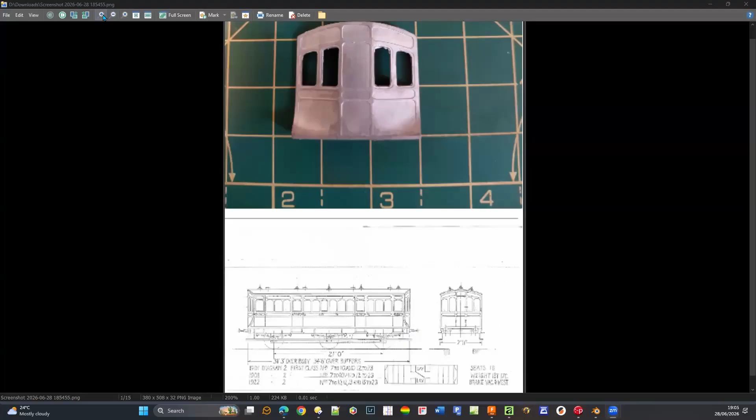I was sent this email the other week, and the request there was, let me get the mouse over, it's this curved bit down here that we're interested in. I'm not covering the bulk of it at all. And if you look at this profile down here, let me just zoom that up a bit. We can see that we've got this front panel here, which is square, if you like, upright. We've got the side panels at an angle, and then they come down and they curve back to the base, which ends up with, you can see the curve there.

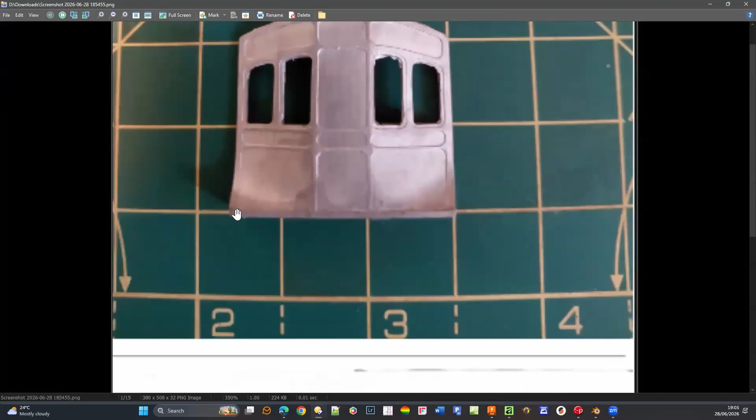And the difficulty, or the problem, the unknown, was creating this curve down here. Now, I'll show you a way I've done it. I'm not suggesting it's the only way, and I'm not suggesting it's the best way, but it's a way that allowed me to answer the email that I had. So let me pull up Fusion. Let's get rid of that a moment. Right, so there's the Fusion finished one.

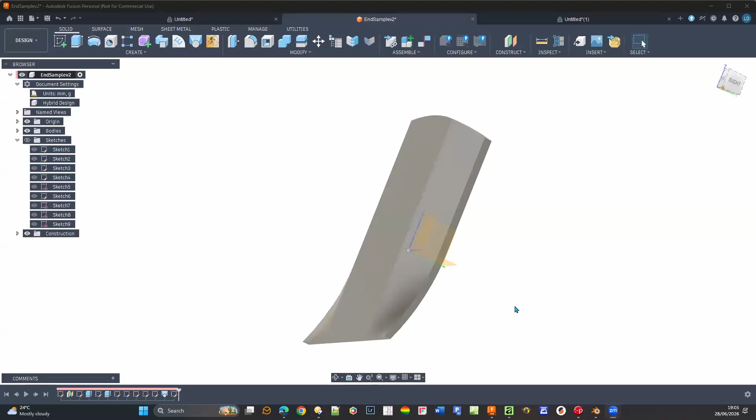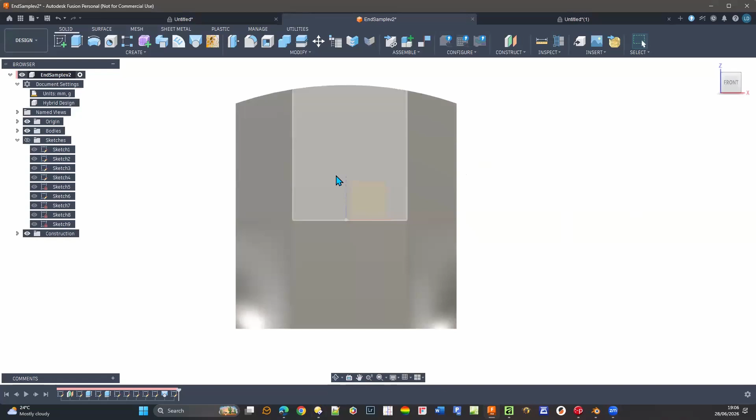I'm not worried about the windows and the bits and pieces. I'm just looking at the front panel itself. And tonight I'm going to concentrate on this bottom half. The top half is just extruded out, and you can just put windows on these faces to suit yourself. But what we're looking at is creating this curve. You can see the shape of it there. You've got the center bit, which is what I call straight down. And then you've got the curve, which comes that way and also that way.

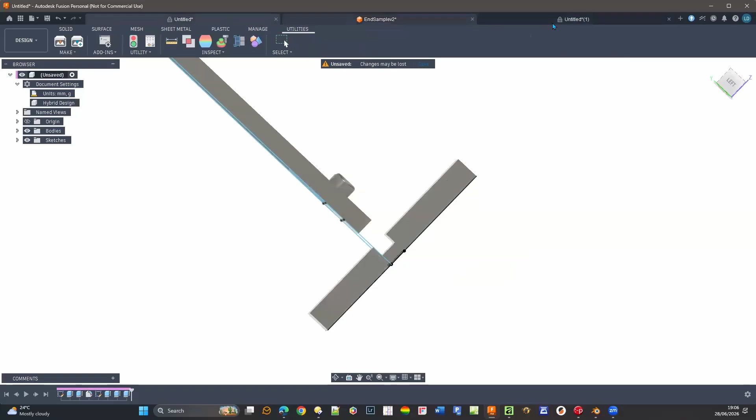I should have titled these and I'd know which one I was looking at. Right, okay, so this is the curve one now that I'm going to show how to get. A little bit like a snowplow, really, I suppose. And I've been assured by the person who requested this that this is the sort of thing they were looking for. So let's have a look at how we do it. Now, I didn't go into that one, that's something else. Right, so I'll backtrack on this one, and we'll come forward. Let me just get back there. Right, and let's switch our sketches on.

So the first thing I did was to create a sketch. Now, if you refer back to the drawing that we looked at, this is what I'm going to call the mid area, if you like, which I think is there. So that sketch is that line there. And the idea is we're going to use that as our base sketch. You can extrude up from that, and we'll be doing a lofting command down. So just to show you how we're going to go about it, let's go back to Fusion. So that's the one sketch.

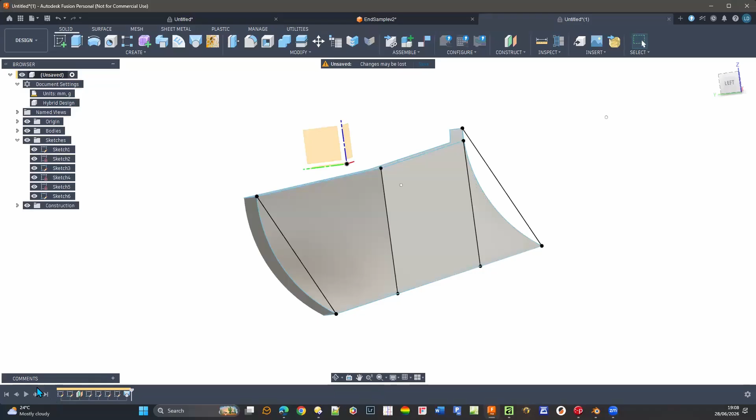Now the next stage is to do the bottom sketch, which is the chassis. And for that one, I created an offset plane. And for this, I'd done about 10 millimeters. I didn't go into dimensions because the idea with this is to show you the technique, not necessarily the dimensions. Let's get the sketches switched on. Hang on, let me just go back. I pressed the wrong buttons again, as I always do. Right, so there's the bottom sketch.

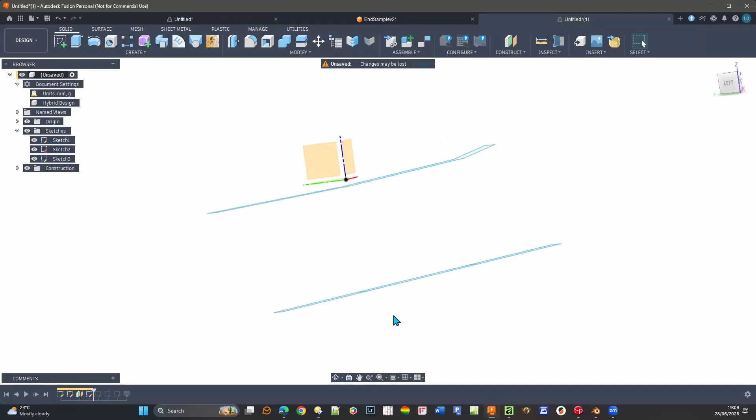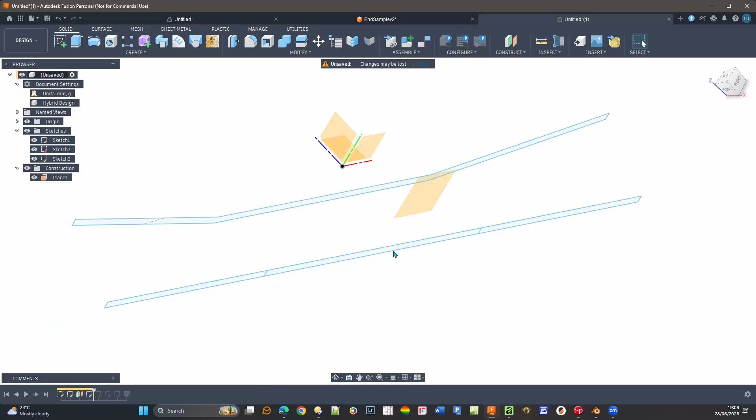Now that sketch there is on another plane. This plane is an offset plane. This top one is drawn on that plane. This is an offset plane at the distance down that you want to go on that front panel, okay? And it's just a straight line. Now, what will become apparent is that this one was drawn underneath that one, and if we go on the top, we can see the pair of them together.

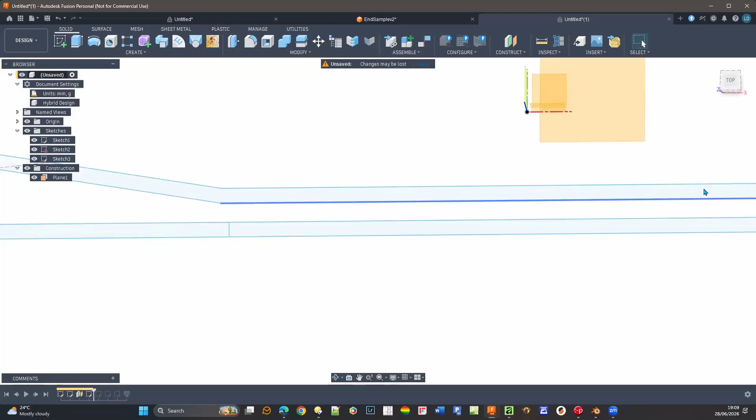Top. That's better. So it's important, I found, that we put two lines here, which you'll see why we do that as we go through it. Now, if we look, the lines basically match up with this bend. These lines are on the bottom sketch, not the top sketch, okay? This will become apparent as I take you through it. So there's our two bits that we would normally do a

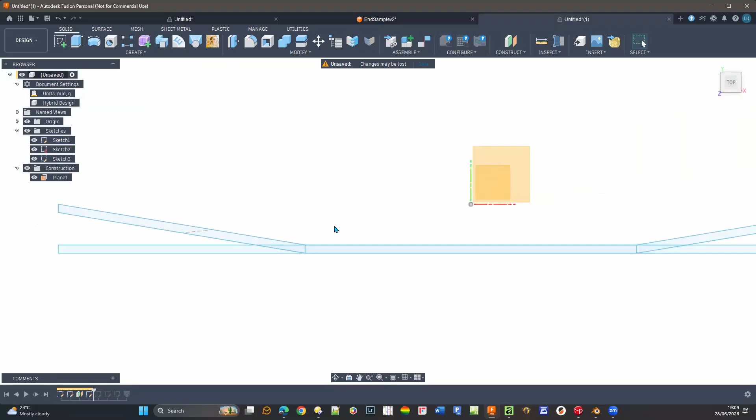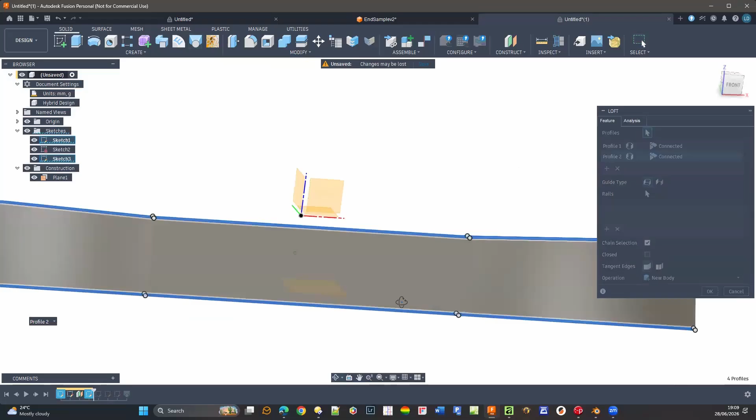lofting on. Now, if we do a loft on there, we can click on the loft tool, highlight the one, highlight the other three because there's three separate ones there, and we have the loft. But you can see we don't have the curved edges. The center one is fine, but this is not right at all. So let's cancel that and see how I got over this one.

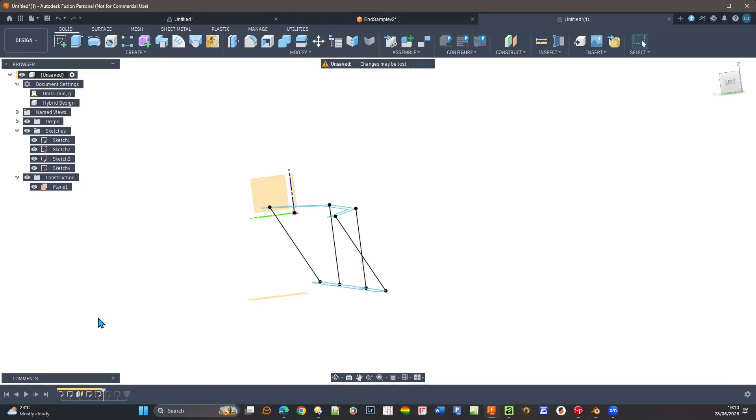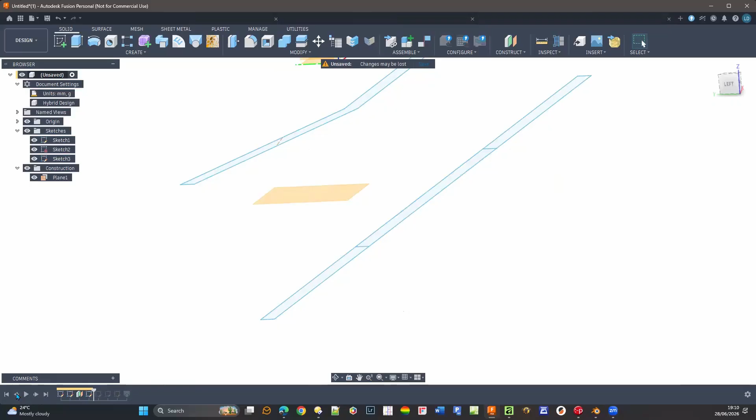So what we do now, we go into 3D sketch mode, and this is where it gets a little bit awkward. So let me just go back one, and our aim now is to create a sketch, a line from that point to that point, and that's why I put those lines in there, which you'll see in a moment. And we also do a sketch of a line at each end. So if I just go back a bit and we go into sketch mode, it doesn't really matter which plane you sketch on because you're going to do it in 3D when we get control of it again.

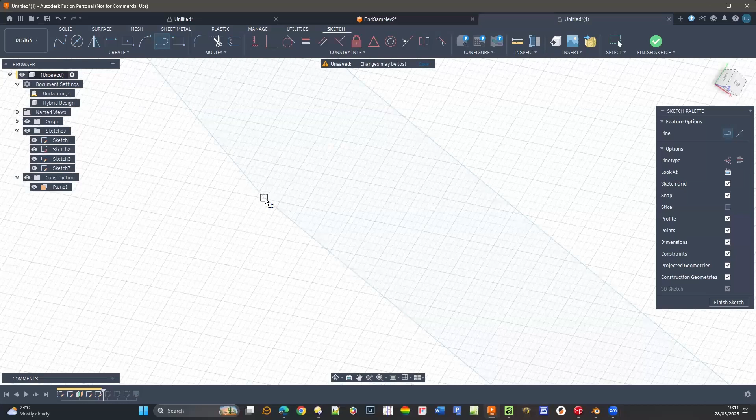The main thing here is also to make sure that the 3D sketch is turned on over here. So what you do is, and you really need to zoom in for this, go into the line command, and as I say, we need a line from here. Now, if you come across, when you get to the point in question, you'll see the square come up. That's the point to click it.

And then we go down to our corresponding line over here, and again, come along until you get the square. And when you get the square, you know then, let me just get it back in.

Whoops. I'll get the hang of this one day.

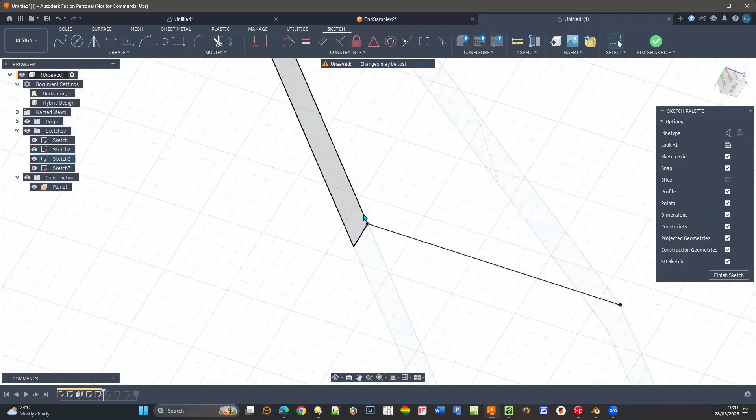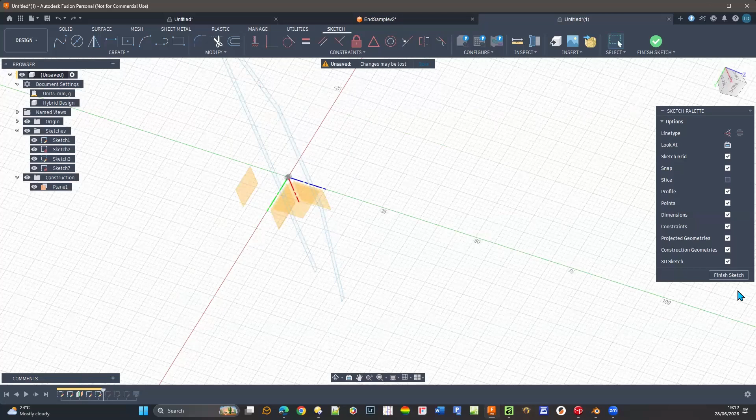You can see now I've actually got a line going from that point to that point. And I do the same thing on the ends, from that point down to that point. And the same on this bend here, from that point down to there, and the same on the end. So let me just cancel that and go back to our sketch on the next one. So you can see now I've got those 4 lines in place.

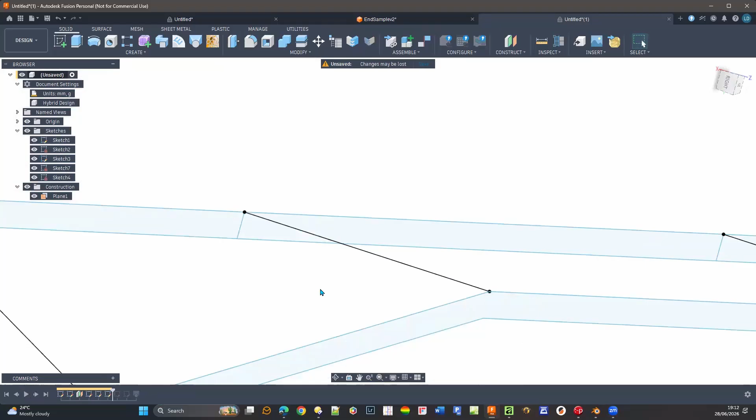But as I say, drawing in 3D can be a bit difficult because if you don't do it in that way, then your line could end up starting there and could end up anywhere down here. So you really need to have some reference points. Now you might think, well, why have I put straight lines here when I'm really aiming for the curve? Partly because by putting the straight line in, I found it easier to put the curve in.

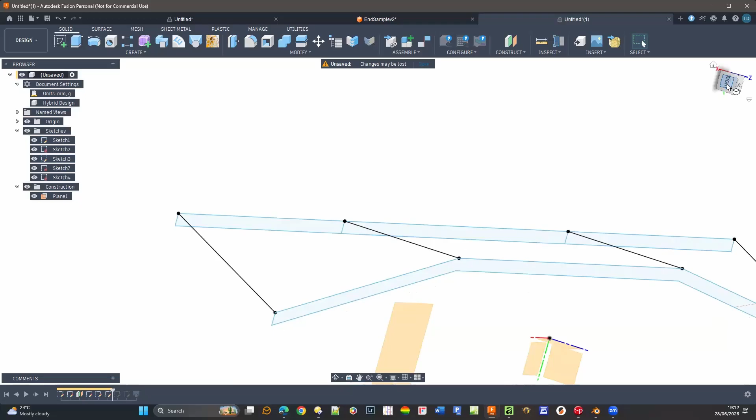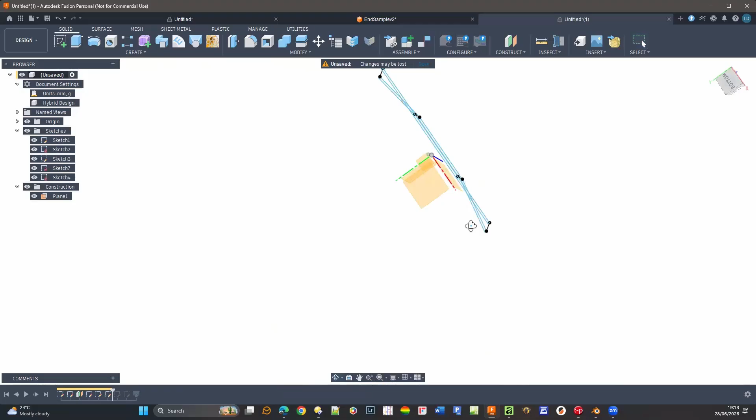Because if you put the curve from that point to that point, the curve itself could go almost anywhere unless you're doing it right. So what I've done with that one is I then go into, let me just get it, let's get it the right way round here. This is where the fun starts. Bear with me. Right. I know it's upside down, but that doesn't really matter.

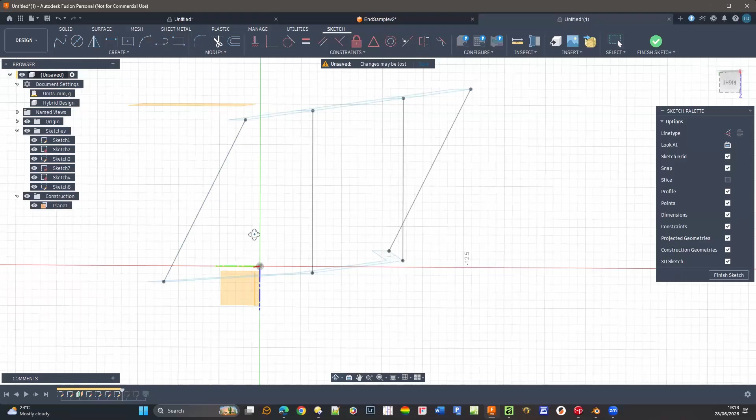So what we're going to do now is we're going back into sketch mode again. And what we're doing this time is drawing the curve from there to there. Now what we've got is that we've got the line to help us. So if we go on a slight angle there, and we go into the 3-point arc, we can then pick up that point quite easily. It will lock to it. We can come down to that point quite easily.

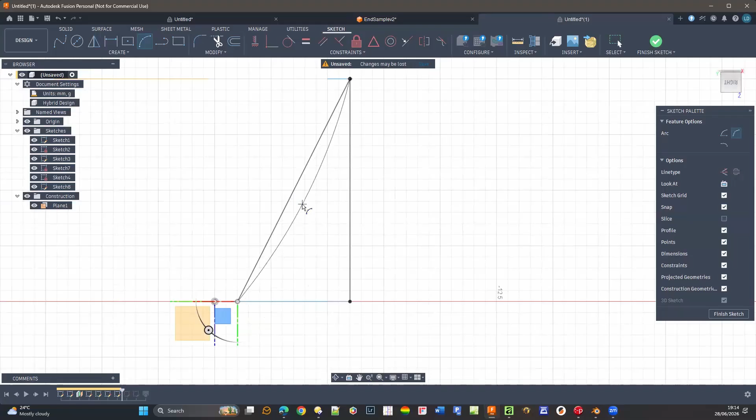Now you can see it can go all over the place, but because we've got that straight line to help us, then we can work out where we want the curve to go. Let's just get that. So you can see how you can come down. Now what you can do, of course, is that you can measure off from the straight line there as well, or you can do it purely by eye.

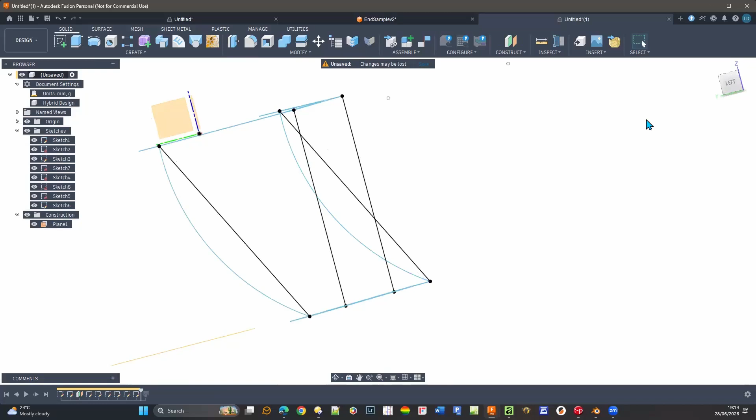If I go back now to the next line, finish the sketch, and you can see there now where I've done the curves. Let's get it the right way up. So you can see where I've drawn a curve from there to there, and then pulled it out from the line.

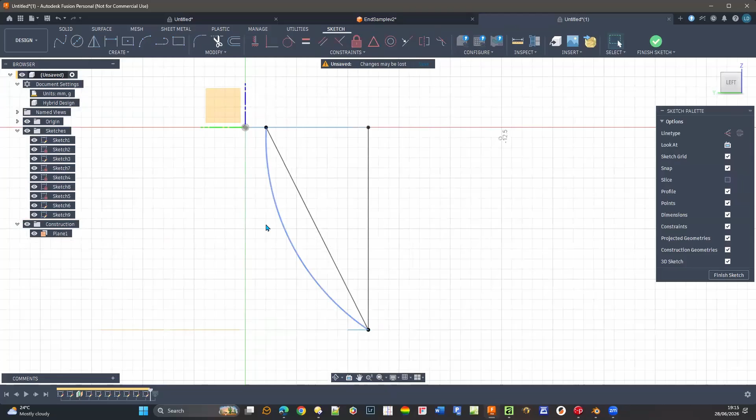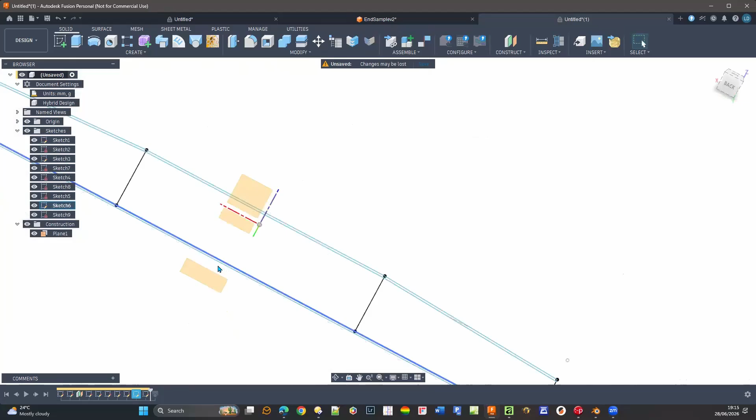Now, when you've done the one of them, it's easy to do the other one, because if I was to do, let's just go into sketch mode again a moment, and I'll delete that one. Oops, let's get rid of it. I think that's the one I want to get rid of. Yeah. So let me go round. And right, and there. It's better.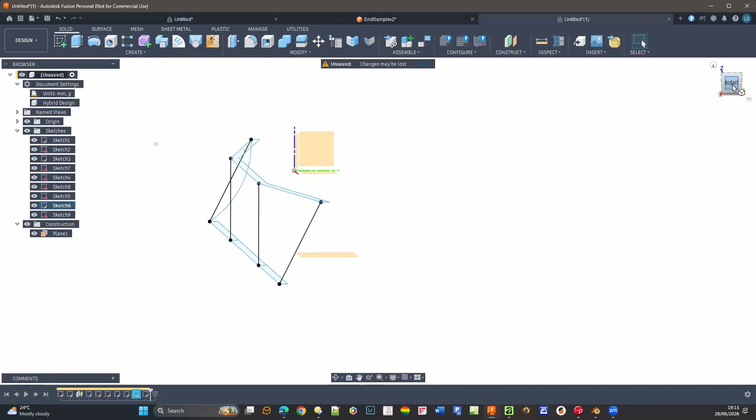So we've done the sketch on the other end, the curve. I want to do the curve on this end. If you get it right the way round in that way, you can then go into sketch mode on there again. And of course, 3-point arc, pick up that point, make sure you got the square, pick up that point. Then all you've got to do actually is just line it up with that one. And that brings you the other one.

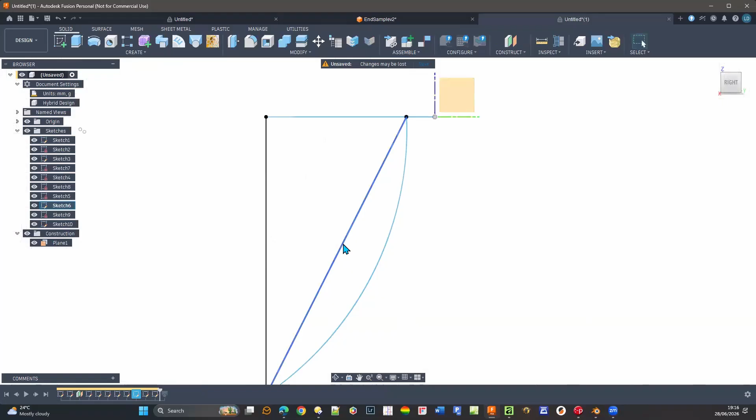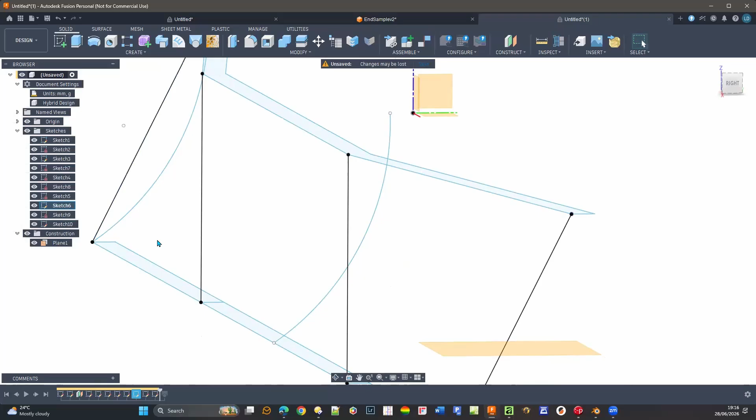If you want to measure this curve, then I would suggest maybe some measurement construction lines out from this straight line. But really, I think it's a sort of curve that can be done almost freehand. So you can see there where I've missed it. So what I'm going to do is undo that one. Let's go back. Because obviously I've picked up the wrong curve.

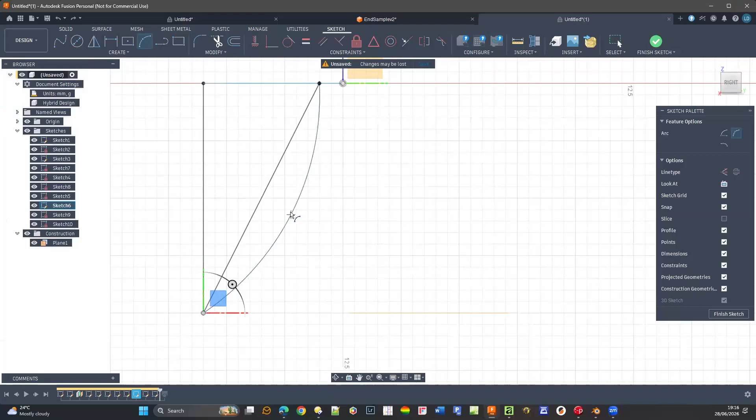If you find that happening, then you need to go into this sort of mode, do it again, make sure that you can get at it, and then down to that one, and then go up to the right one, and then line it up. 3D drawing can be a bit difficult because you're not quite sure where your points are. If we look at it now, we should be okay.

They're in the right place now. You can see how easy it is to pick up the wrong one. So sometimes you have to just go into a 3D view as well to pick up the right points, and then go back into your right one to line it up with the other one.

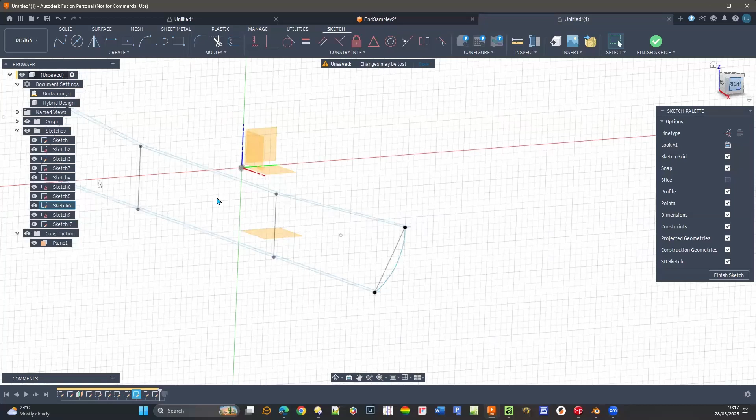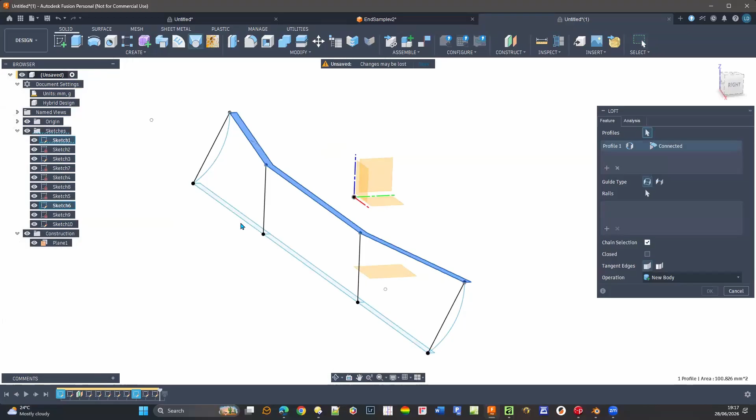Hope that makes sense. Having got to that stage, we can now go into our loft stage. We're taking the top one, and taking it to the bottom one, and we've got the same stupid shape we had last time.

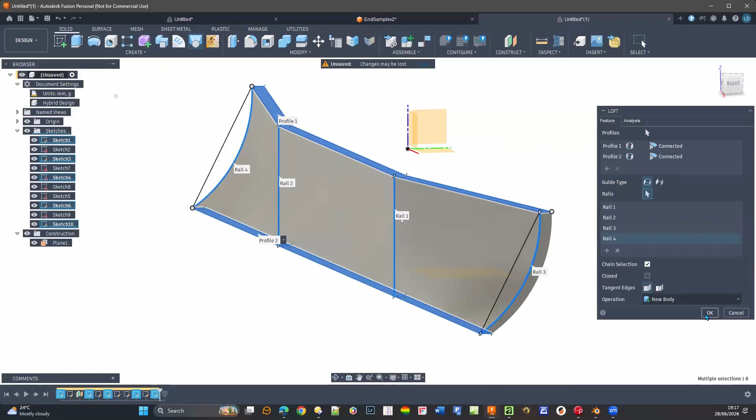But what we do now is use the rails. So we click on the rails, we select that rail and that rail, which forces the nice center one. Then we pick that rail, and that rail, and do OK. And if we switch the sketches off, we can now see we've got the shape that we want. Albeit proportionally, it's nothing like the original, but you can see how we got the curve.

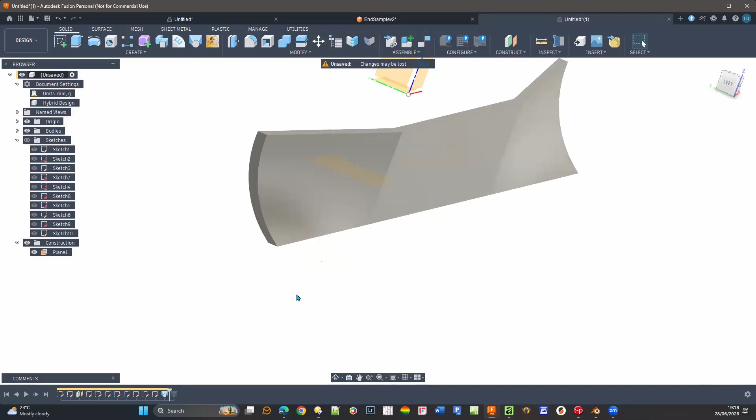We've done lofting before, and I think the only lofting we've done is from shape to shape. If you want the lofting from shape to shape, but controlled, then you put rails in. And wherever you put the rails in, then the loft will do that rail.

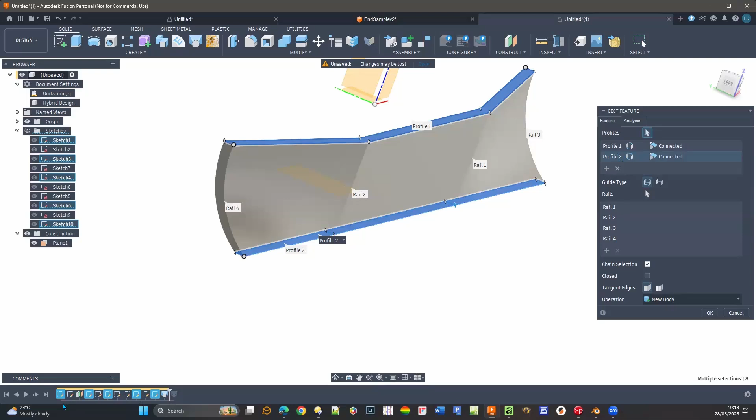So what we've done there, if we'd have taken these rails out, let's just go back and see what we've got. Let's just take them out, go back a minute. If we close off that one and go back to... put the sketches back on. Let's go back to the lofting again.

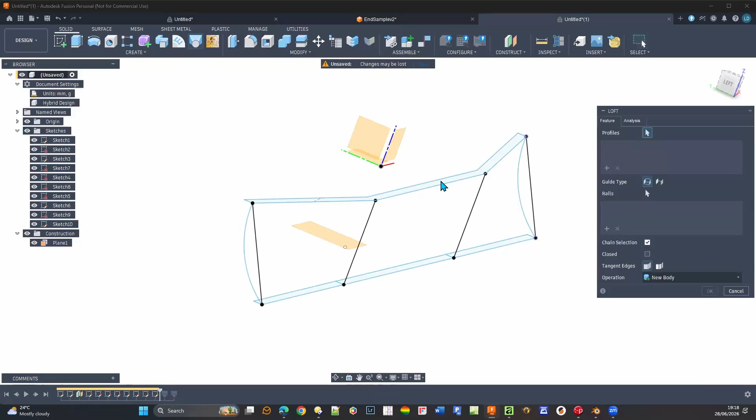And if we click on the top one, and of course this is in 3 sections because we got those lines, but those lines could have been construction lines. They're purely markers for those straight lines, as I said earlier.

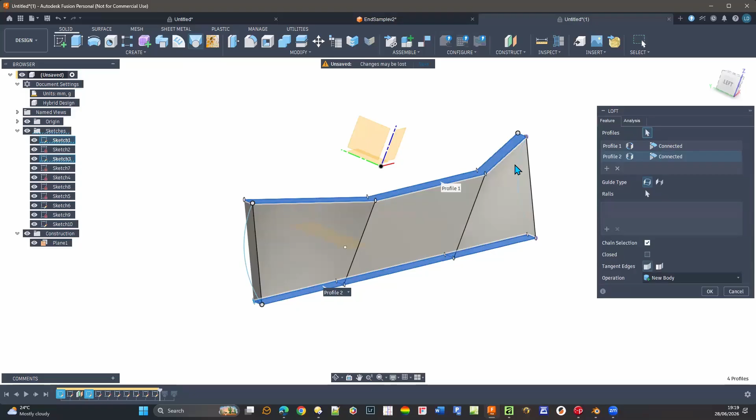Now, if we only take, say, the end rails and ignore the center 2, you can see what happens. It will just go straight through, which is not what we want, because we want the center section square. So we have to have those rails as well.

Now, if we'd have had another rail in there, we could have done all sorts of shapes. Using lofting with rails, you can create any shape you want, but it does start to get a bit awkward because, as I say, you're doing curves in 3D, and it's not that difficult once you start getting the hang of it.

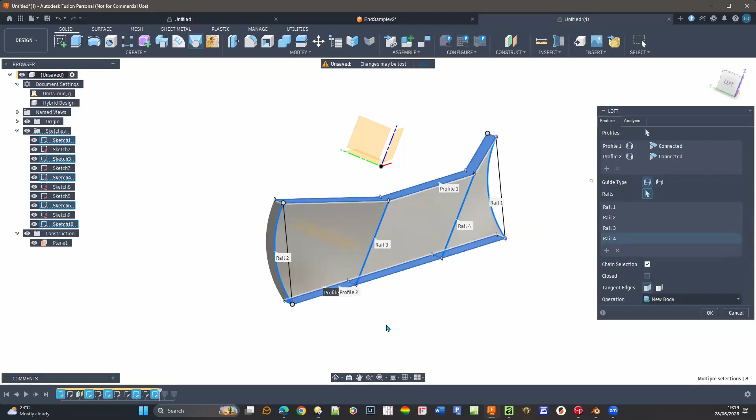So that ends up really showing the shape that we want there. Switch off the sketches. Now, from the point of view of the other ones on there, I would just lift that up, and we can extrude that up however far we want to go.

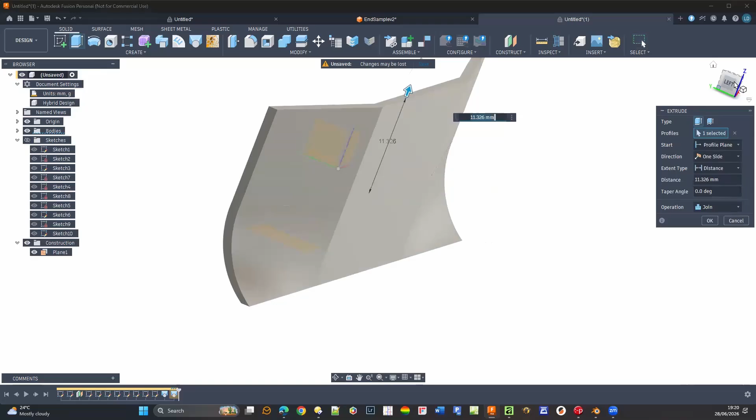Let's get it back in. Proportions are all over the place here, aren't they? And then if you want to do the curved top, which you've seen in the drawing, the easy thing there is to pick the center sketch again on the arc.

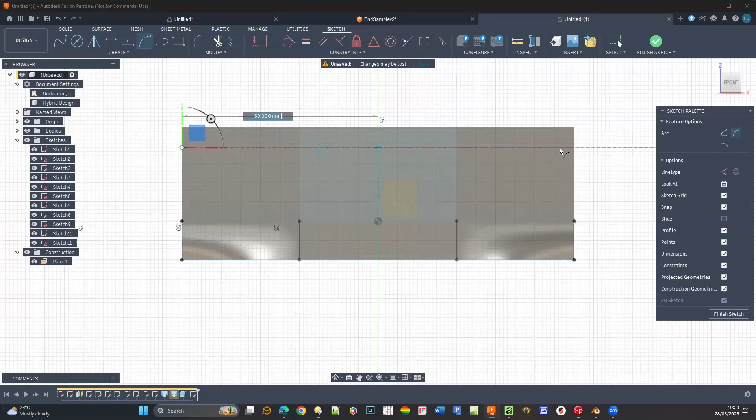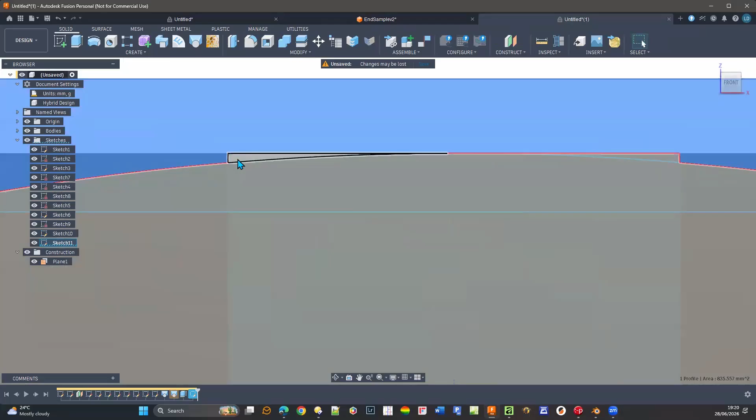Pick up the arc that you want, say there, and then I would just draw another rectangle anywhere up here, it doesn't matter. Finish the sketch, switch the sketches on, then highlight that one, highlight those little bits there, and use the extrude tool and just shove it backwards. And that's the top done.

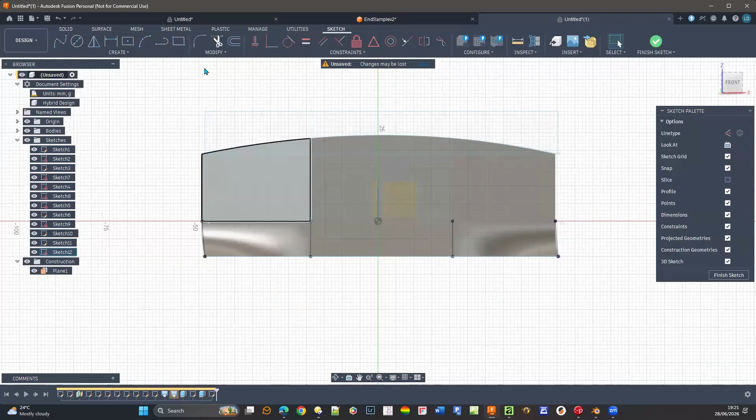And then on these, you can just sketch, go on there, and I'm not going to draw them in any degree of detail here, but you can just put your windows in wherever you want them. As I say, I'm not going to go through the detail here. And then just punch those out as well with the extrude command.

And the same on the front, and the same with the panels. If we go back to the drawing that we had here, you do the same with the panels, and the same with these, except these you wouldn't punch right through. You would just depress them by, if you've got a millimeter thickness wall, then depress them by a quarter millimeter or whatever it is you want for your size in your printing.

And the same with these front panels here. They're all done the same way. That's just straightforward stuff, really.

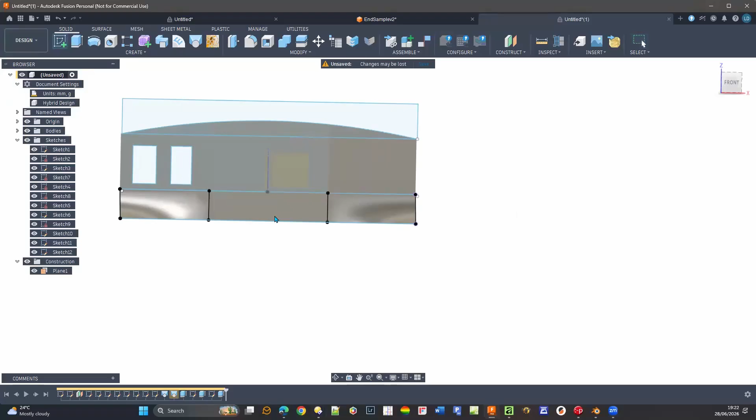If you want to do the recessed panel on the curved one, then the answer on that one is slightly different. Let's get rid of this drawing again a minute. If you want to do something on this one, then what I would suggest is that you use the emboss command. So we would do an emboss on that one, on this front panel, do our panel roughly there where we want it.

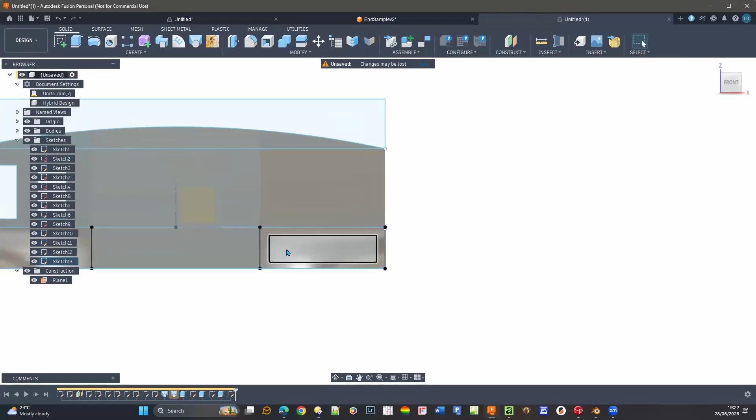This is covered in videos that we've got on my site and the MERG site. And then what you would do then, because if you do an extrusion, the extrusion will be deeper here than here, because of course the extrusion will hit this curve before it hits the other one.

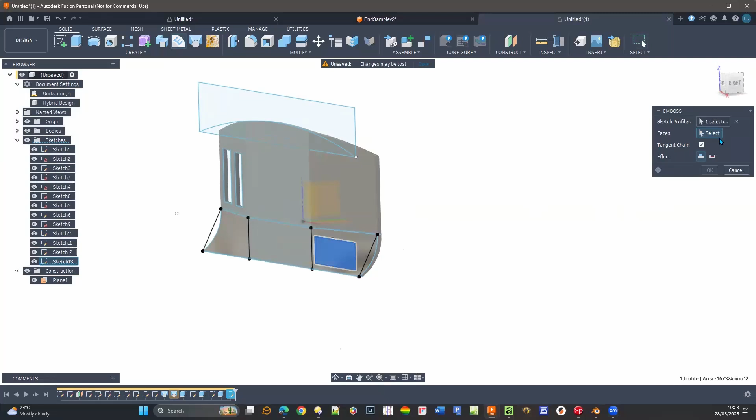Whereas if you use the emboss command and the profile and then the face, which is there, you can emboss it on there, select the face, and then you can emboss that one back so it hits the face where you want it to, and have it embossed on there quite well.

Okay, so that just about ends it, I think, unless there's any quick questions on that one.

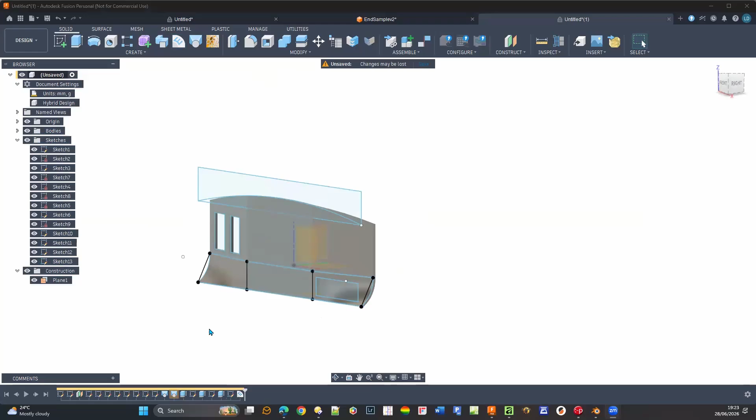Are there questions? Russ, I didn't say it when you were doing it, but I was wondering: once you get to the rails, you obviously want the two middle ones straight. After you've done the curves, wouldn't it be an asset to actually remove the angled ones?

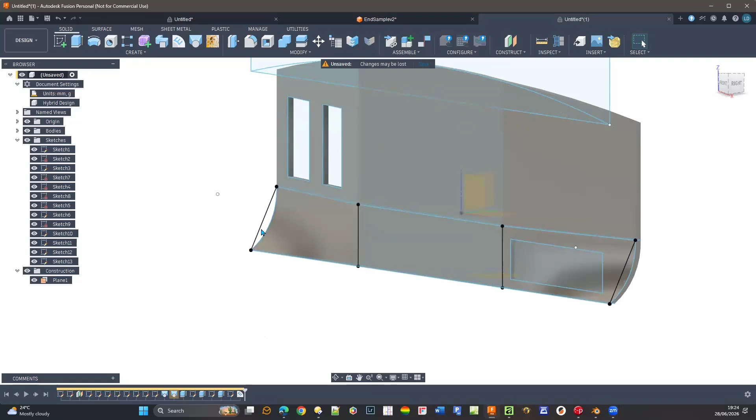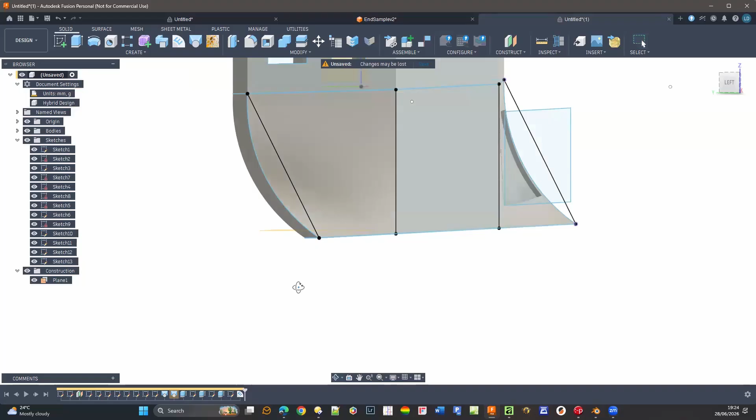You mean these black ones here? Yeah, once you've got the curve in place, you don't need them. I was going to say, before you do the arc, yeah, and then get rid of them. Oh yes, certainly, they are there. The only reason I put them there is because I found it gives you a better anchor point when you're putting the curve in, because you can find them easily. It also allows it, if you really want to measure the curve, you've got something to measure from, as it were.

But no, they can be deleted because they're not used at all. Yeah, okay. In one sense, really, you can argue they shouldn't be solid - they should be construction lines anyway. They're purely an aid. I found they're an aid to getting a nice curve in there visually. I know you could measure off here and put a marker there, so you do a 3-point arc through a marker.

It really depends what you want. I think for a model of this nature, to be honest with you, as long as you do by eye a nice curve that's got a little bit of a straight bit there, so it doesn't curve like that - because obviously you don't want it curving beyond this upright. I think the best way there is to do it by eye. So yeah, it's not necessary once you've got the endpoints in.

Thank you, Russ, that was really clear and it solved the problem. Good. When you first sent the email, I panicked a bit and I thought, oh blimey, here we go.

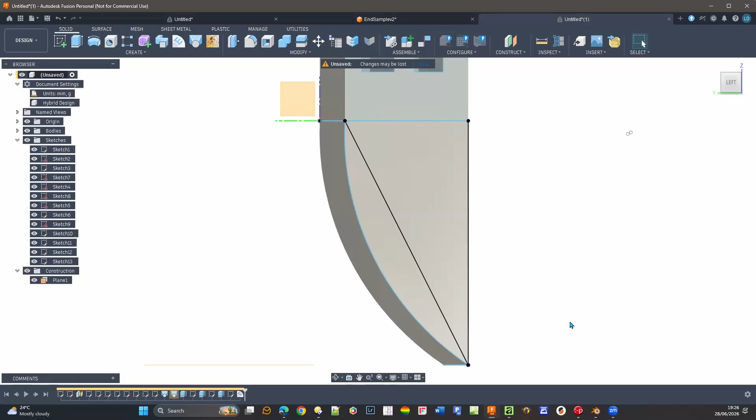I don't think we need to get into that area, because the other one that you may have looked at, Ian, which is on the website, on both websites, is when I done the roof of the GWR diesel coach. Yeah, similar sort of technique, if you like.

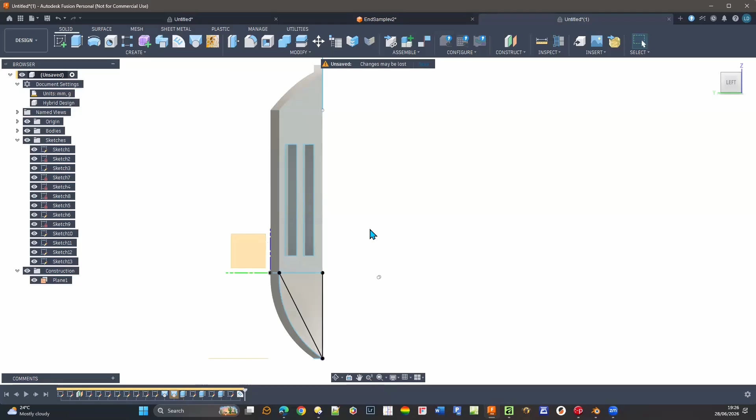One of the things that I think people have got to realize now is that in sketch mode, I'm a big favor of cutting. Very quickly, let me just do a quick new sketch just to demonstrate it, if you like.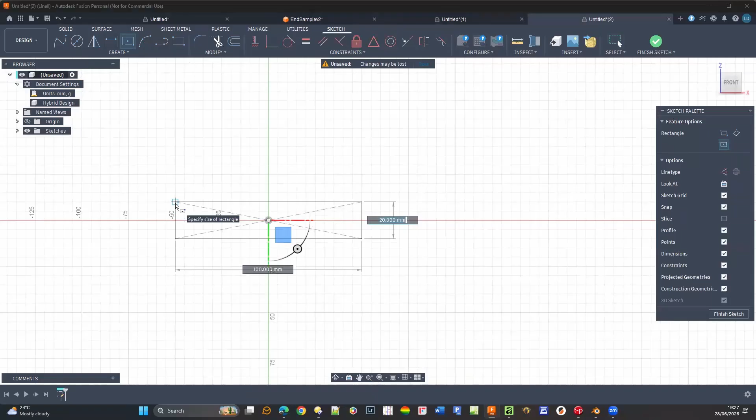One of the things we done on your one section is to do your curve section, if you like, and I'm not doing this dimensionally now. I did it by doing that, and then I did a straight line, say from there to there, and my grid is already in the size that I want. I went from there to there.

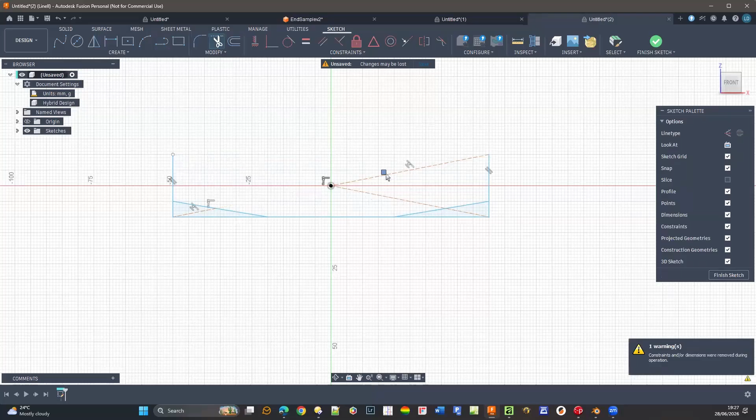I love the scissors because then I cut out what I don't want. I prefer it to any of the delete tools. Now, the sort of thing you want a thickness to that, so the answer is to go there and put a thickness on.

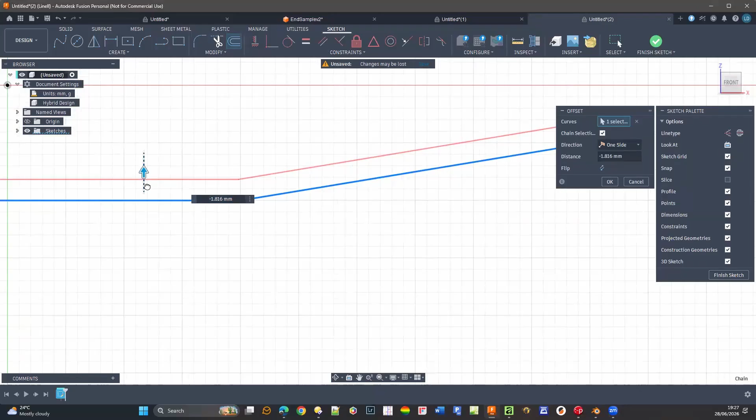But then the angle, the ends then are not upright. So what I prefer to do is to take it the other way. I'm doing this quite quickly. Then I can draw the lines. So what I would do at the end one, because I want a square end, I would just draw there - simple as that. And then I use my scissors command to chop that bit off and chop that bit off.

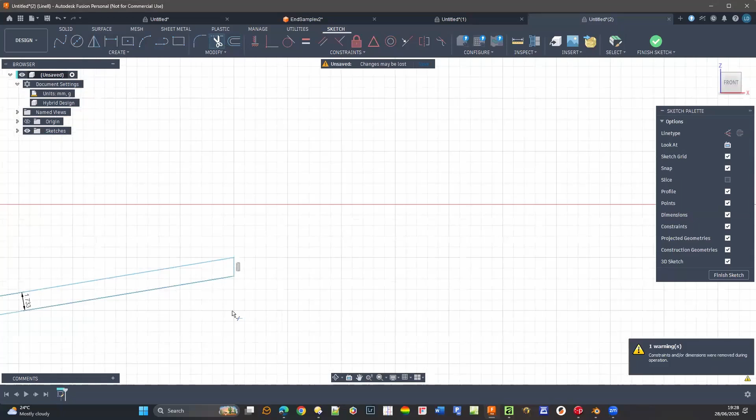I don't mess about trying to measure it or draw it. Scissors, I think, is the best command on there. There's no doubt about it, really. So it's getting the shape.